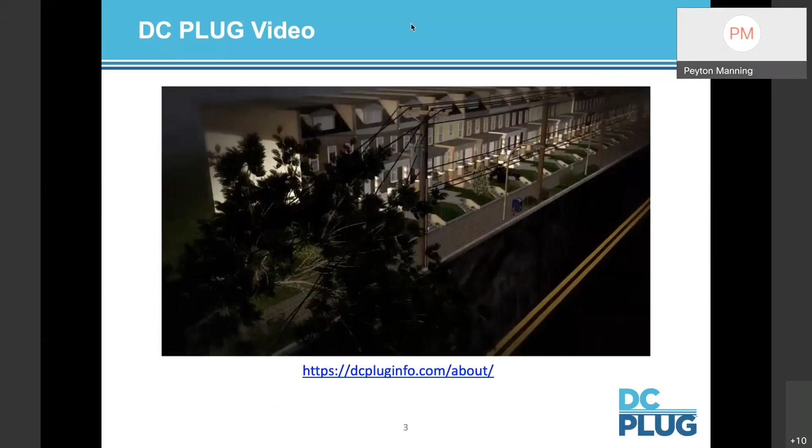The District of Columbia has experienced more violent storms in recent years, resulting in extensive power outages. For this reason, the District and Pepco are working to reduce power outages by moving many of the overhead power lines underground to improve the infrastructure and enhance resiliency.

Neighborhoods affected by construction will be notified well in advance of the project start date. This will include the posting of no parking signs. Construction will begin with the coordination of streets and sidewalks impacted in your neighborhood. Signs will be posted, and flaggers will direct vehicles and pedestrians around construction crews.

Before any digging begins, other existing utility lines that may be in the path of construction will be carefully identified and marked in the field. In some cases, small plants, trees, and grass will need to be removed from public spaces to allow for digging and placement of new underground equipment. But we will do our best to retain as much vegetation as possible. Any public property disturbed by this work will be restored to its original condition.

Construction workers will use asphalt saws to cut the pavement. A backhoe will dig a trench for the placement of the distribution line. Periodically along the main primary line, manholes and tap holes will be required to house equipment and to provide access for inspections and repairs. The backhoe will also be utilized in these cases to excavate for these structures. In order to meet jurisdictional safety requirements, shoring will be provided in the trench to ensure stability.

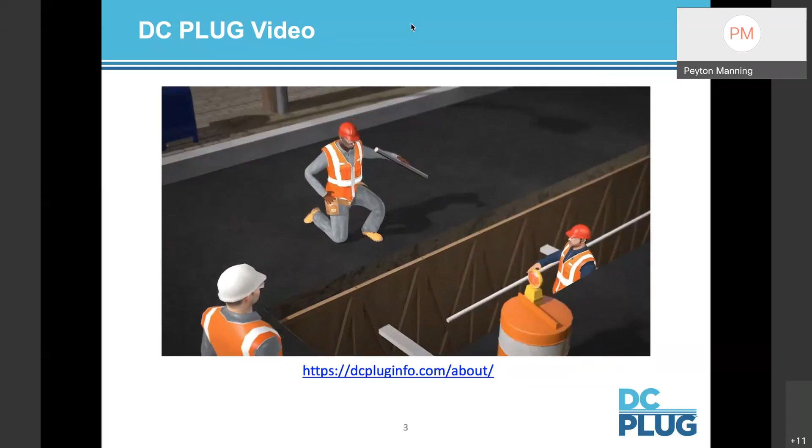Pepco uses either fiberglass or plastic PVC conduit to protect underground power lines. Concrete will be poured into the trench to encase and secure the conduit, and steel plates will be placed over the trench temporarily to make the road usable to vehicle traffic. After the concrete is set, the steel plates will be removed and the trench will be repaved in sections.

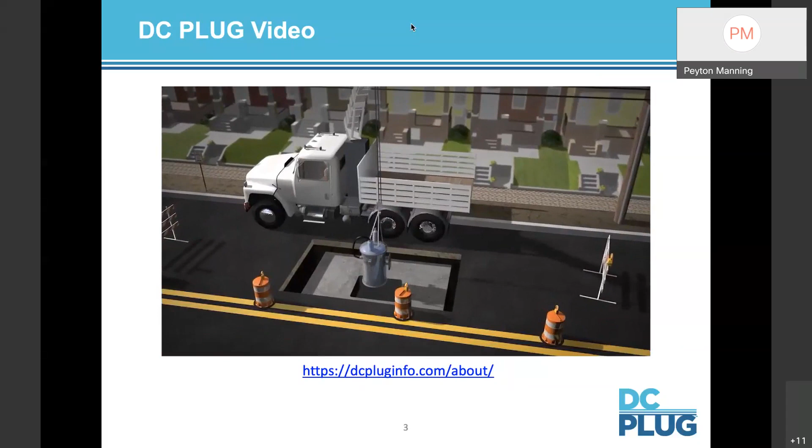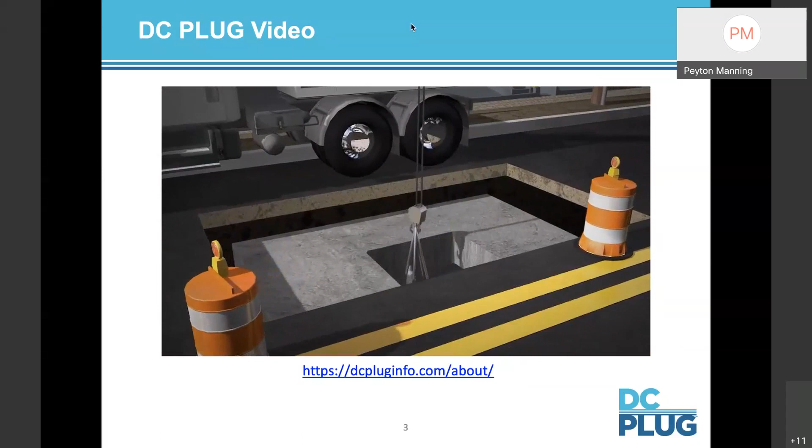Transformers, switches, and other ancillary equipment will be set in place. Equipment such as transformers and switches will be installed either in the roadway or the sidewalk, depending on space availability. Underground cable will be installed. Landscaping will be restored as needed and roads paved. Overhead primary electric wires will be removed from poles, but secondary service and communication lines will remain. Finally, the new underground power lines will be energized.

While electricity will remain on throughout the project, there will be a short scheduled outage needed to switch from the overhead lines to the new underground system. We appreciate your patience while the District and Pepco improve the future of electrical service for the District of Columbia residents.

And that's just a brief overview of the project. I'll now pass it on to Donna Cooper to begin the presentation.

Thank you very much, Peyton. First of all, I just wanted to welcome you and thank you for being a part of tonight's engagement to discuss the DC Powerline Undergrounding Initiative. I just wanted to provide a little bit of historical context and share with you our excitement that this project is moving forward.

This project goes back several years. It was initiated in 2012 after the derecho that we experienced. That was a very significant storm event that many of you may recall resulted in multi-day outages for customers within this region, as well as further north, as well as west.

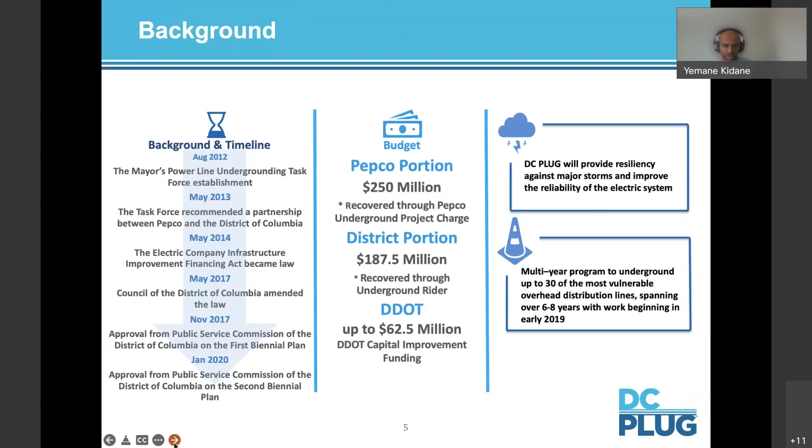As stated earlier, the main focus of this program is resiliency against major storms, to improve the reliability of the system. So here we're going to show how we achieve that resiliency by undergrounding the system. You can see the existing system is overhead—green indicates a house that does not have a power outage, and red indicates a house seeing an outage.

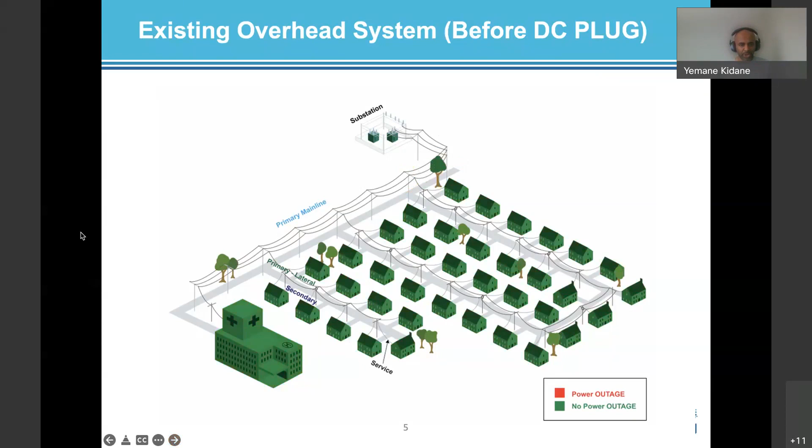What happens here, at the middle top of the page, you can see a tree falling and hitting the existing overhead wires. So the entire neighborhood sees an outage as a result of this wire going down. On the next page, you'll see the difference—as we underground the main lines and the same tree falls, there will not be any impact to the majority of the houses. They will remain green because we have undergrounded the lines. But we are keeping the secondaries overhead.

The secondaries provide power for a handful of houses. So if a tree hits a secondary, only a few houses will see an outage, so the impact is reduced significantly. As stated in the video, the poles are going to remain in place because they will be supporting the secondaries as well as the communication lines.

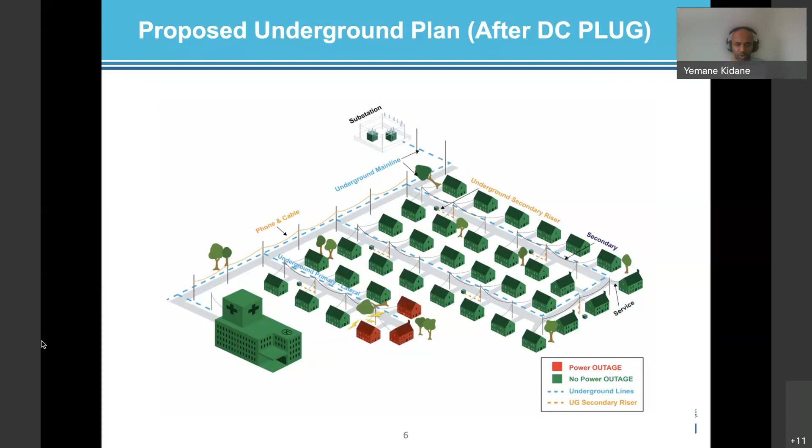As soon as we are done undergrounding the lines, we are going to remove the existing overhead line and then also top the poles to 3 feet above the highest or top wire level. So that is the scope. With that, I'll pass it on to Keith Fox from DDOT.

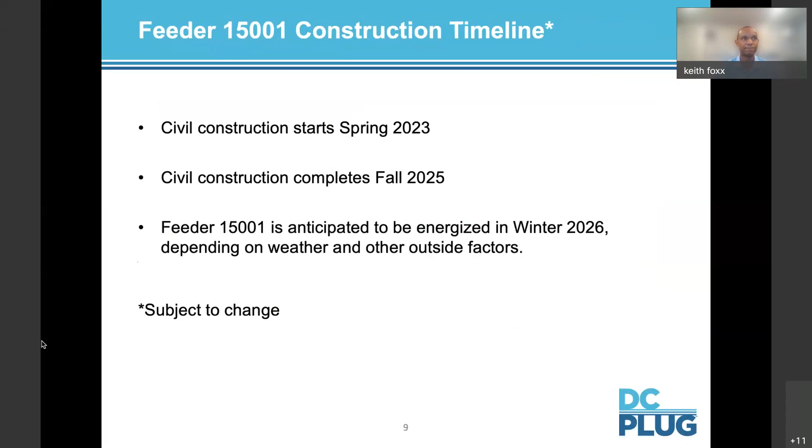When construction crews first start the project, you'll see signage go up and tree protection installed. These items reference the scope of work: tree protection to protect the trees, and erosion and sediment control measures set up to protect the storm drain inlets. All of this you'll see in the immediate work areas, followed by installation of duct bank, electrical manholes, tap holes, and transformer enclosures.

There's a few more pictures on the next slide. Roadways will be restored along with pavement markings that may have been removed during construction. Once the civil construction is complete, the electrical work will begin. The civil construction is the construction of the conduits and manholes. Later, the electrical cable will be pulled through the system, and then this work will be energized.

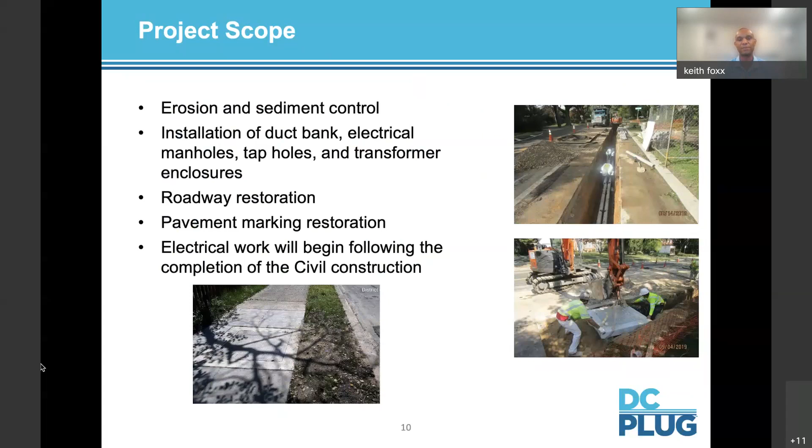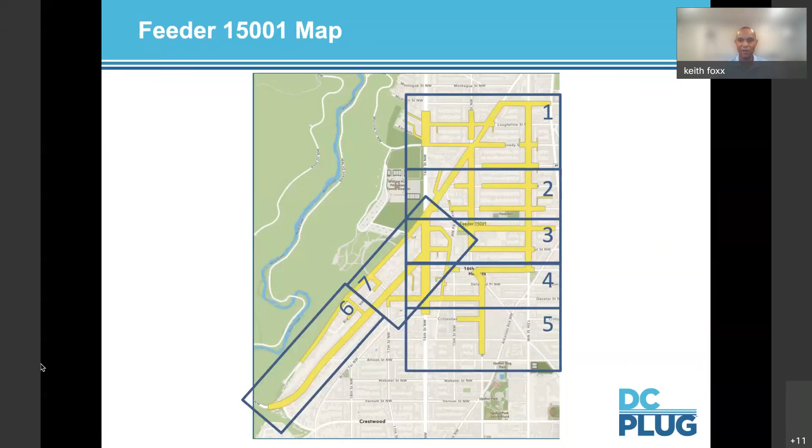This slide shows the general feeder area. We'll move through the next slides quickly, but they'll show the proposed locations of the underground duct bank, shown in light blue, and the structures in dark blue. If anyone is interested in taking a closer look, we'll be sharing these on the DC Plug info website. You can also reach out by email, which will be at the end of this presentation, and directly request the information from the DC Plug team. This presentation will also be on DDOT's YouTube page.

Again, these slides will be available for folks to take a closer look at these areas at any time, and you will also be able to contact us directly.

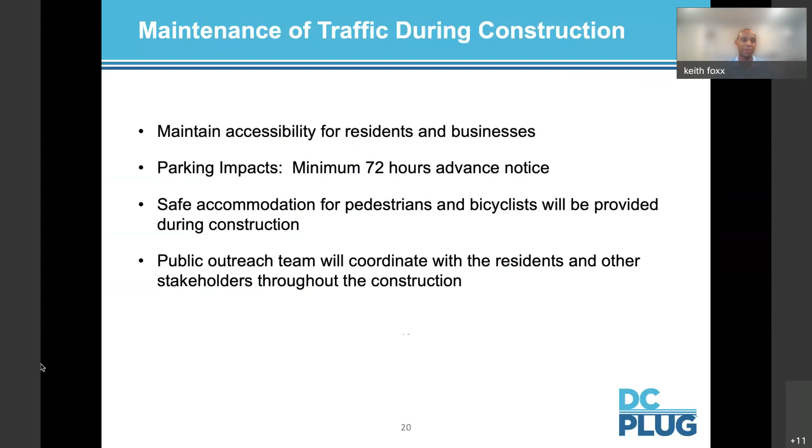Here is a typical section for maintenance of traffic during construction. The area shown in red would be the excavation area, and the work area there would be protected by a traffic drum.

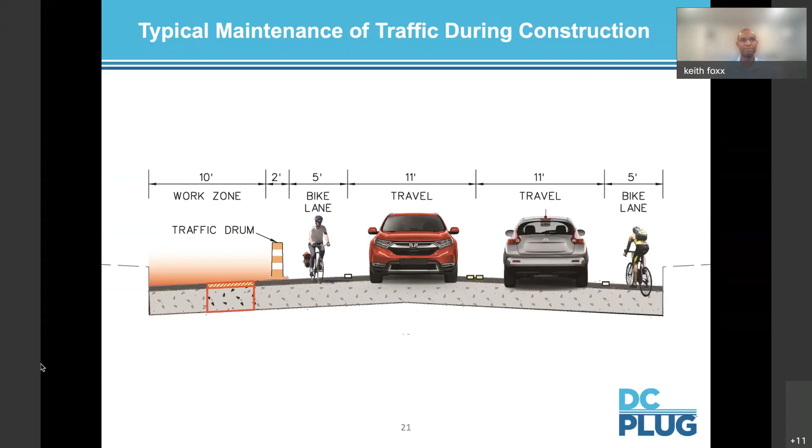And again, this is another typical scenario that you might see, and this is without biking lanes. Here is a typical section that you might see when the work is in the middle of the road and the area is protected by traffic drums on each side. And again, another scenario here.

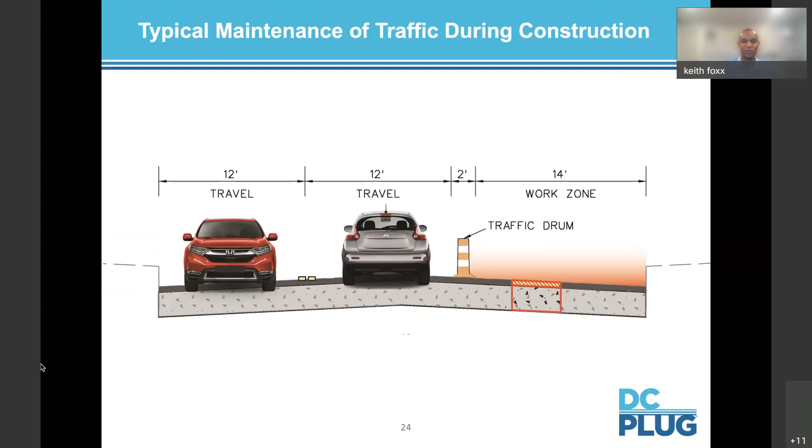And at this point, I'd like to hand it off to Raisha, who will speak about the integrated communication strategy. Thanks, Keith. My name is Raisha Quarry. I'm with the public outreach team.

Right now, we're in the design phase for this feeder. In the design phase, our public outreach team has met with Councilmember Janeese Lewis George, met with the ANCs 4A and 4C, as well as hosting this open house. We still have plans to do phone calls as well as sidewalk meetings with the customers that will have the transformer enclosures outside of their homes, on the sidewalk outside of their homes.

To ensure proper community engagement, the DC Plug communications team has created a customer education plan for the construction phase of the project. Per that education plan, customers will receive notifications in the form of door hangers, calls, flyers, emails, postcards, corner signs, etc., at least but not limited to 30 days prior, 14 days prior, and 7 days prior to construction.

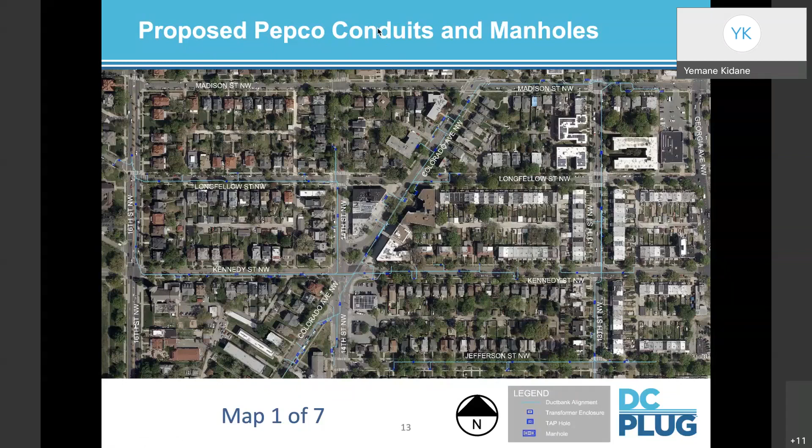Whoever you have responsible for the distribution end of these notices, keep an eye on them, because they're not doing what I would consider to be a thorough job. So at this point, I guess there's a website I can visit if I want more information, I'll do that.

And I thank you all for having this meeting and answering my questions. Yep, thank you for the opportunity and feedback. Yes, sir.

Thank you. We have a few questions in the Q&A. The first one is from Jim Thomas. He says, will you accommodate parking for individuals with handicapped parking spots in front of our homes?

And I'm going to hand this over to Yemane or Keith. Yeah, this is Keith. We will make every effort, particularly for handicap parking. We'll work with the contractor to try to maintain that parking in front of your home. If not, because of construction right there, we will try to accommodate and have the parking available somewhere very close, keeping in mind that that is handicap parking. So the answer to your question is that we will try to accommodate that during construction.

Thank you, Keith. Our next question is from Jeff Stewart. Why not extend the project to include all of Blagden Terrace, not Blagden Avenue?

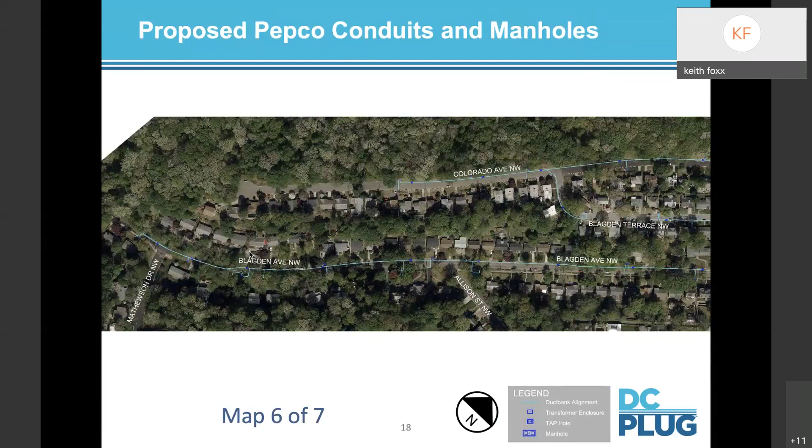The reason why I asked to pull this up, it appears that there's a portion of Blagden Terrace that's also supposed to be underground also. Thank you, okay, good point. I appreciate that. Our next question is from John Stenweg.

His question is, I support the principle and live in the 1400 block of Decatur Street. Since our power is fed from the alley, how will this benefit residents on my block?

Yeah, so if your block is fed from this specific feeder 15001, you're going to get that resiliency against major storms because we've placed the feeder underground. During major storms, you're not going to see the outage that you would normally see. So that's the main objective of this DC plug power undergrounding project.

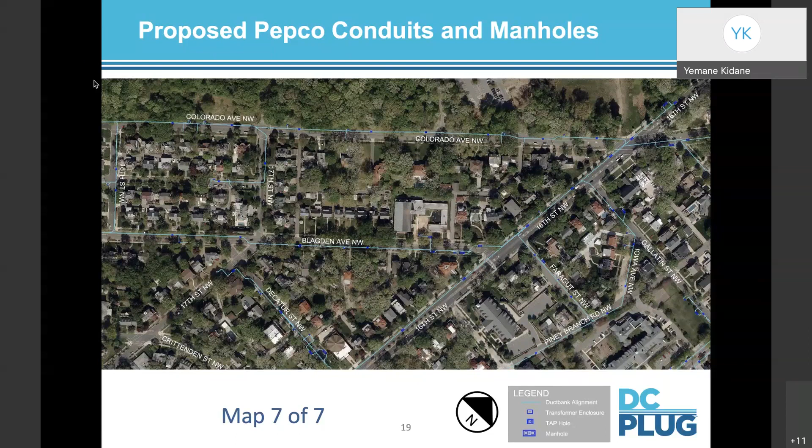Thank you, team. I have another question from Daniel Ball. Can you please clarify, after the completion, will we still have overhead wires from the street to our homes? Thank you.

So the primaries and main lines will be placed underground, but the service lines, basically the ones that connect your home to the first pole outside, will still remain overhead. So yes, there would be an overhead line that'll be left, but it's the secondary line and only supplies a handful of houses.

Okay, thank you, Yemane. The next question is from Jay Jones. How long is the design phase? This is Keith. It's an aggressive 12 months, so we expect to have the final design complete in May of this year.

Thank you. I don't see any additional questions in the Q&A at this point. Hey, Jam, this is Peyton. I believe there's a hand raised as well. Molly, if you wanted to unmute.

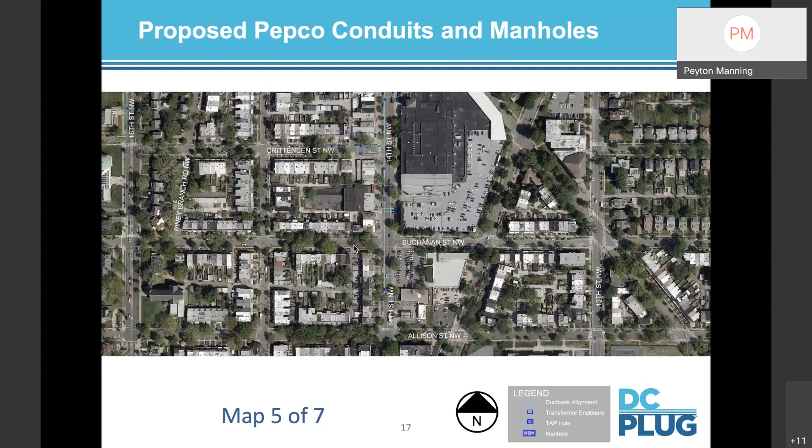One of the questions I have in reference to your construction phase is, will the digging be taking part on the sidewalks or on the roadways? And will there be steel plates involved for the cover up, as well as how quick do you plan to repave the sidewalks?

This is Keith. The answer to your question is that there will be work in the street. There will also be some work in the sidewalk. And during that construction work, the contractors will have to make safe accommodations for pedestrians and bicyclists on those sidewalks. You asked if we would be using steel plates, and the answer is yes, typically. And those steel plates will also have to be made with safe accommodations.

So they'd be feathered. They would be set up such that there wouldn't be a lot of noise from them. And if they're in any walking or bike path, they should be recessed.

Okay, just want to thank you for answering. Comment: all work will be within public space. So just want to make sure that everyone understands that.

Yeah, that was part of my question, because public space also includes sidewalk and part of residents' homes. Another question or suggestion that I strongly request for this project is vibration testing for each block. I'm having issues with Washington Gas line replacements on the 1200 block of Kennedy Street, and this block was strongly affected due to the vibration. When work was being done on the residents' homes as part of public space, whether it was street or sidewalk, the voids in the street just caused too much vibration, where now our residents' homes have cracks and are having structural damage. So for this project, which seems similar to what Washington Gas is doing in our neighborhood, I do have that strong concern about the vibration that will be caused on each block as you guys do your construction.